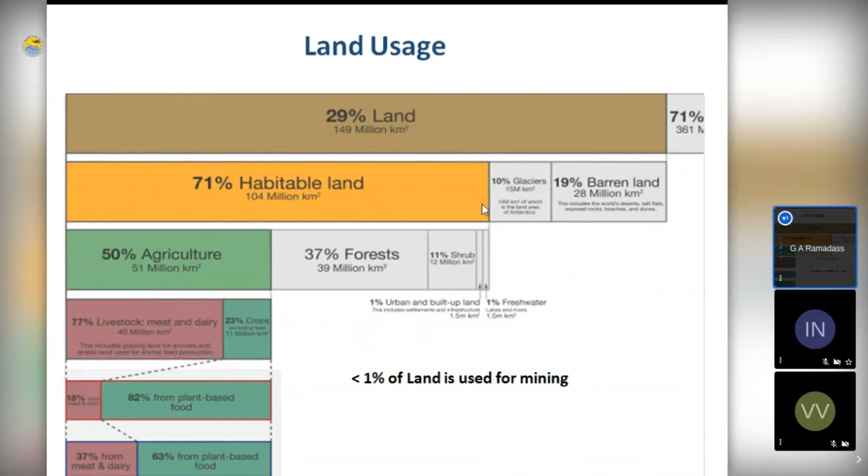Like that, if you see, hardly 1% of the land is used for mining. And we have been using the minerals from this land. We have been using, misusing and abusing these minerals for the last 5,000 years. And imagine if 1% can see us through for 5,000 years, then what can 70% give us? So that is the importance of the deep ocean mining concept.

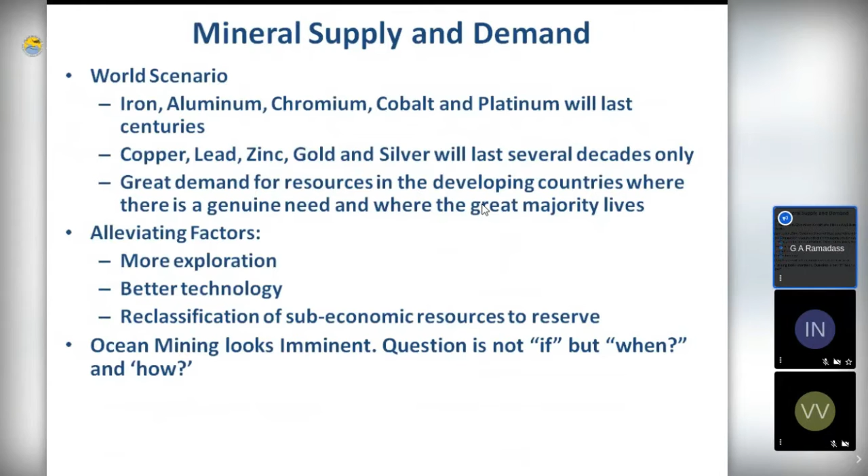Of course, we can alleviate these things by more exploration, better technology, and reclassification of resources to reserves. But there is a limit to what we can do about it. So ocean mining is imminent. It's not the question of if, but when and how.

So this is the history. In 1870 itself, there was speculation by Jules Verne, a famous science fiction writer, about the availability of these minerals at the sea bottom. But he said it is easy to exploit it. It's easier said than done, and we find it very difficult now. And as you can see in the right-hand side corner, that's a painting of HMS Challenger.

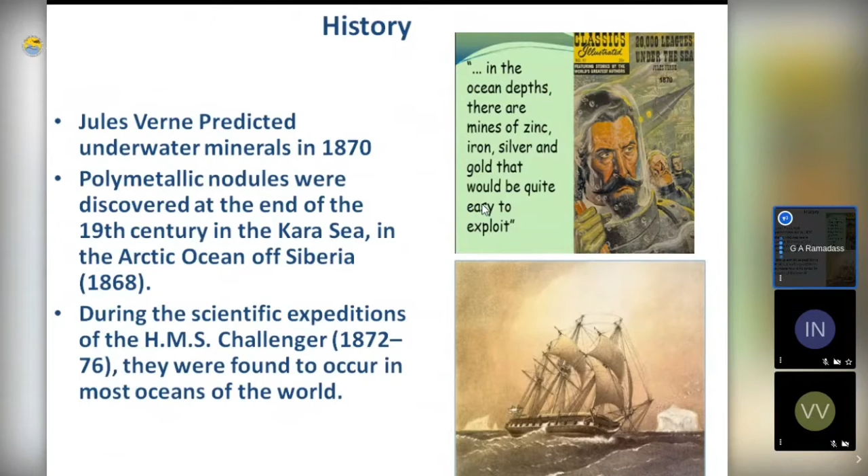During 1872 to 76, they sampled some polymetallic nodules, which are like potatoes strewn on the seafloor, and they found that they are rich in iron, cobalt, nickel, and manganese. So we can say that that is the beginning of the ocean mining efforts.

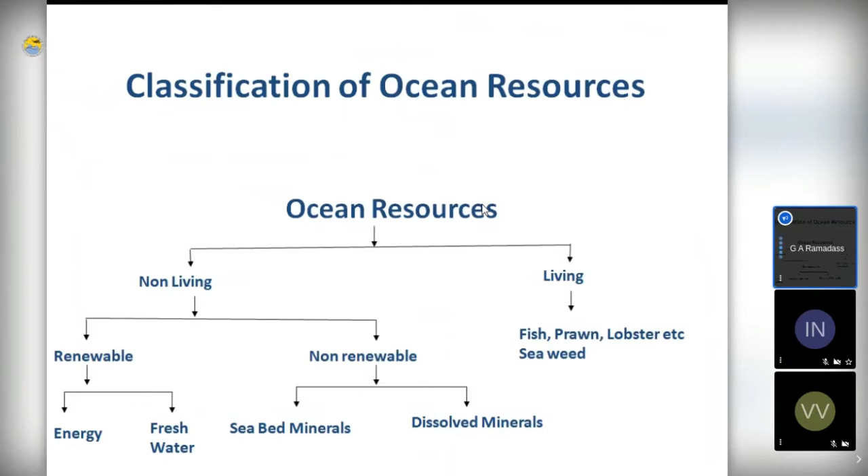And there is no unique way of classification of these ocean resources, but I can say that there can be living and non-living resources. In the non-living, today we are going to concentrate only on the seabed minerals, because there are some dissolved minerals like salts, uranium, and other metals. Our concentration is on the seabed minerals like oil and natural gas, but I'm not going to talk much on them, and diamonds also I'm not going to talk about.

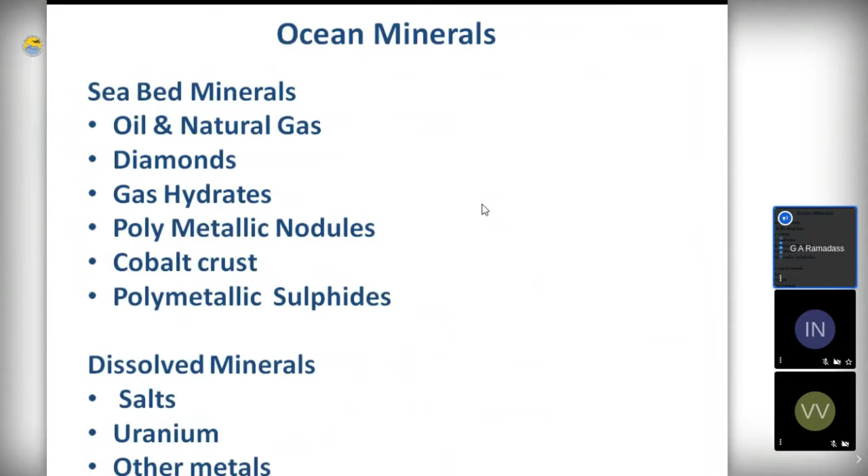But gas hydrates, polymetallic nodules, cobalt crusts, and polymetallic sulfides are of interest to the Ministry of Earth Sciences. So we will be concentrating on these four resources. As you can see, India has an exclusive economic zone which extends up to 200 nautical miles. The extended exclusive economic zone extends even further. So whatever is available here is our resources. We can use them without any express permission from any other organization.

But beyond that, it's called the high seas, and it is regulated by the United Nations, especially by the International Seabed Authority. It is an independent body, and they allot areas for the exploration and exploitation of the minerals, and that area is called the Area. Here the rights are only given for what is available on the seafloor, but the waters above are called high seas, and we have no rights to them. A portion of the profits from this mining, whenever it comes, should be considered common heritage of mankind, and it should be used for all mankind.

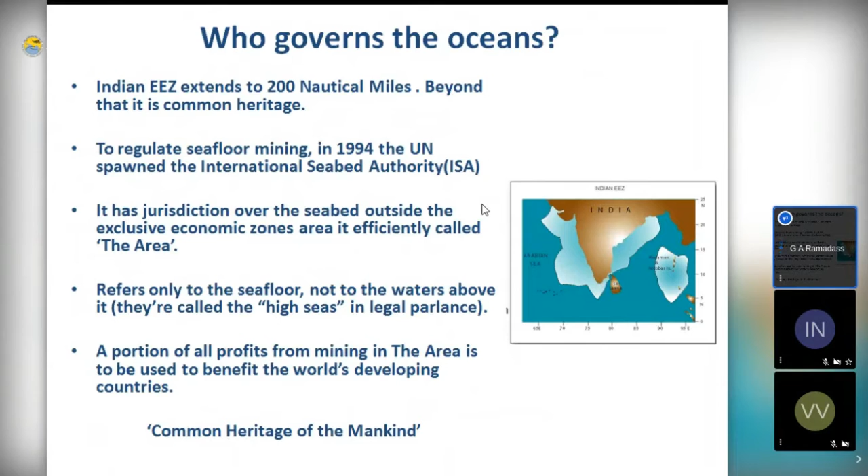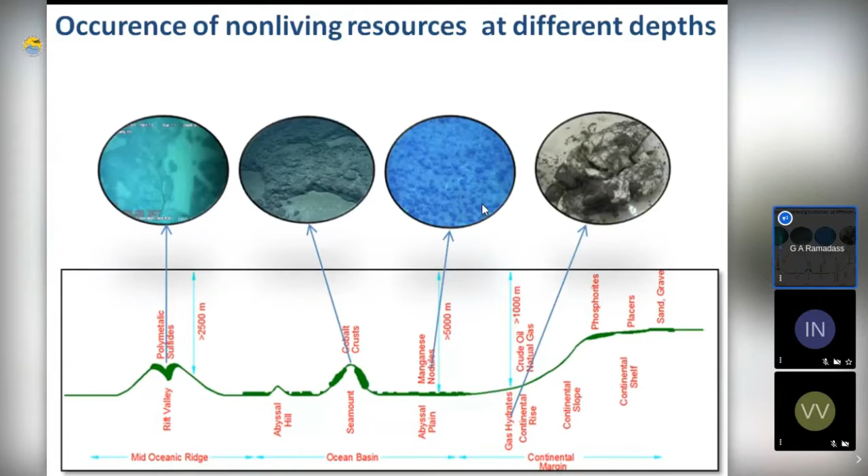So where do these minerals occur? Starting from the continental slope and continental rise, the first mineral that generally occurs is the gas hydrates. As the very name suggests, it is a hydrate which contains gas. It is like camphor. It can be lighted, and you can hold it also.

It's estimated that even if a mere 15% of the world's gas hydrates can be tapped, the next 200 years of energy requirements can be met. Of course, we have to take it with a big pinch of salt. So the Ministry of Earth Sciences has an exclusive program on these gas hydrates, especially in the Krishna Godavari basin. We have concentrated our efforts.

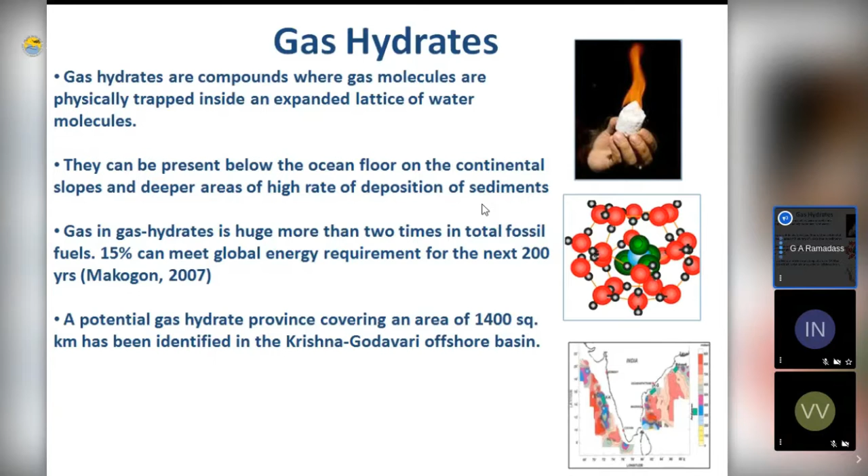The next one is polymetallic nodules. These polymetallic nodules are ferromanganese deposits. They actually look like potatoes, maximum 10 centimeters in size. They are called two-dimensional minerals in the sense that they are available on the sea floor, and all we have to do is pick them up from those depths. But it's at 4,500 to 5,500 meters water depth.

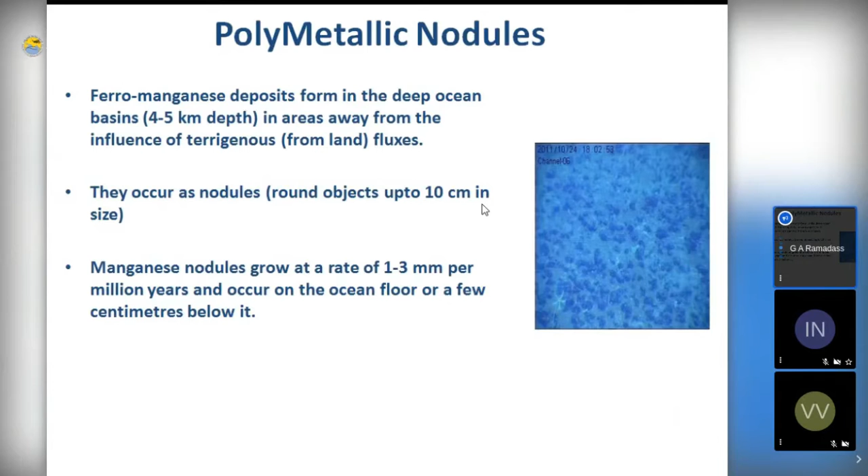And these nodules grow very slowly, maybe 1 to 3 millimeters per million years. And that too, when there is a nucleus like a shark tooth or some kind of hard rock, around that, layer by layer, these things grow.

As the old joke goes, by the time the ship reaches there and starts working, 50% of the team is seasick and the rest of the team is homesick.

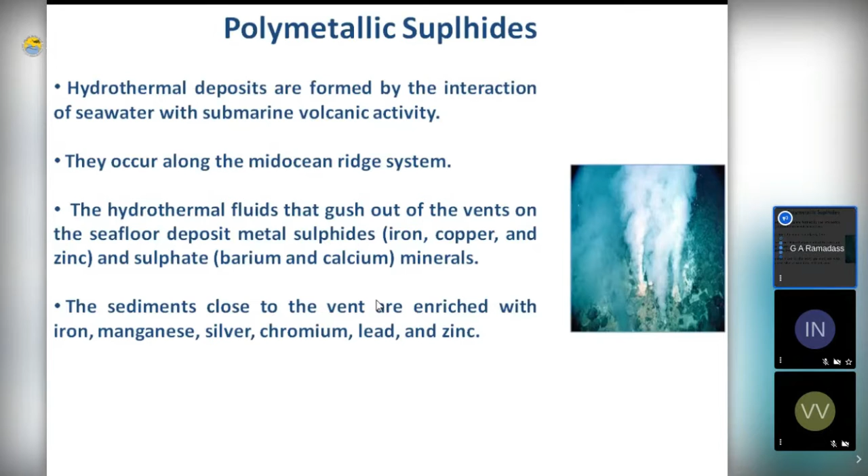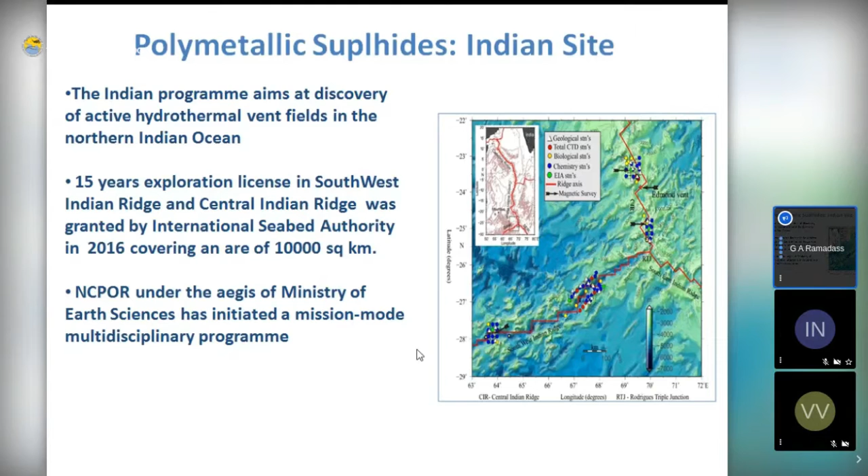And India has signed an agreement again with the International Seabed Authority for a 15-year exploration license in 2016. This is even further, at around 25 to 26 degrees south, as you can see in the picture. And the National Centre for Polar and Ocean Research, NCPOR, under the aegis of MoES, has started a mission mode multidisciplinary program, and they have done a lot of survey and sampling work at this place.

Another important mineral is the cobalt crust. Cobalt crust is very much similar to the nodules, but they are like layers stuck to the ocean bed. So we have to scrape it and take it. It's not exactly a 2D mineral, so it needs some kind of hard scraping. It generally occurs in seamounts, and there are around 33,000 seamounts worldwide. In the map, the areas marked are the seamounts. India has not yet signed any contract with the ISBA for exploration of this cobalt crust.

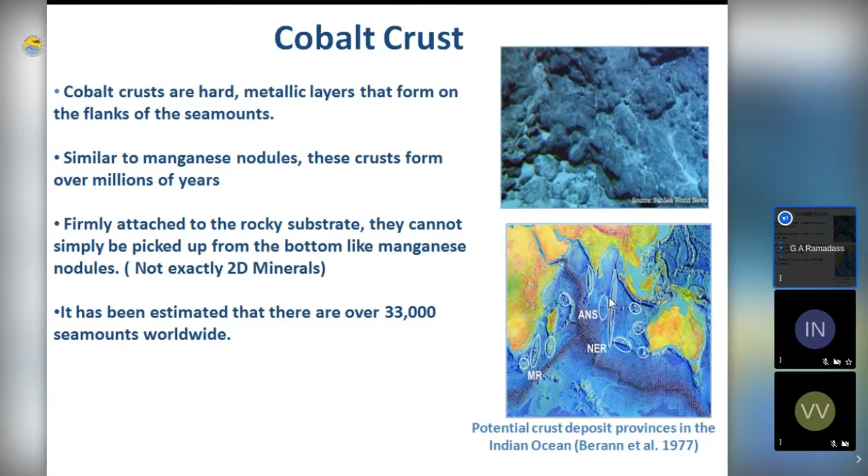So what are the challenges? Minerals are available, but it's not as easy as terrestrial mining, because oceans, as we call it inner space, are more difficult to conquer because it's a dynamic medium, and the hydrostatic pressure at 6,000 meters is around 600 bar. So if you send a big vehicle there, it actually becomes a sort of pulp at those pressures. So we need to develop appropriate pressure resistant, pressure compensated, and pressure tolerant technologies. Density and salinity variations also pose problems. Temperature is around 35 degrees on the surface and around 2 degrees centigrade at the bottom.

Of course, corrosion, especially galvanic corrosion of different metals, is a serious problem. Another serious problem is electromagnetic radiation doesn't travel in water more than a few hundreds of meters, or tens of meters in fact. So you can control a Mars rover sitting on Earth, but you cannot control a machine that is operating on the seabed from the ship without a cable, because electromagnetic radiation doesn't even travel maybe beyond 100 meters. So we have to depend on sound, which is 1 lakh times slower, and the information that can be carried is very small using that.

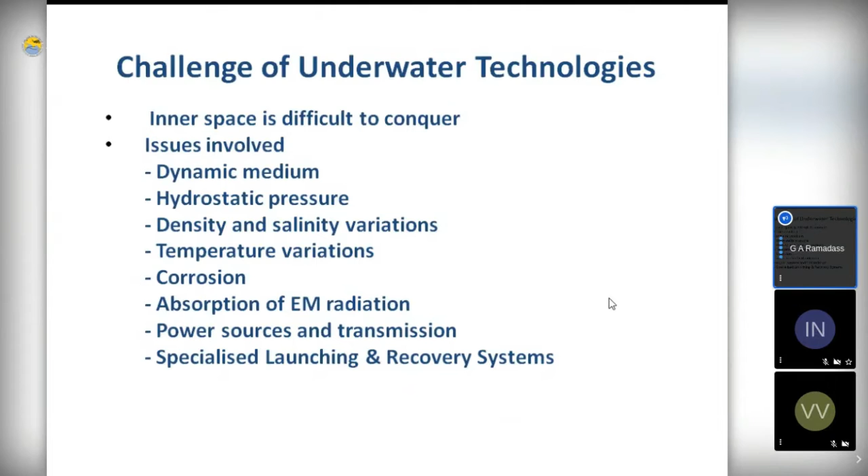And power sources and transmission: the power has to be transmitted from the top using a very long cable or using batteries with some limited capacity. And also the ship actually is not very stable in the high seas. So we need specialized launching and recovery systems.

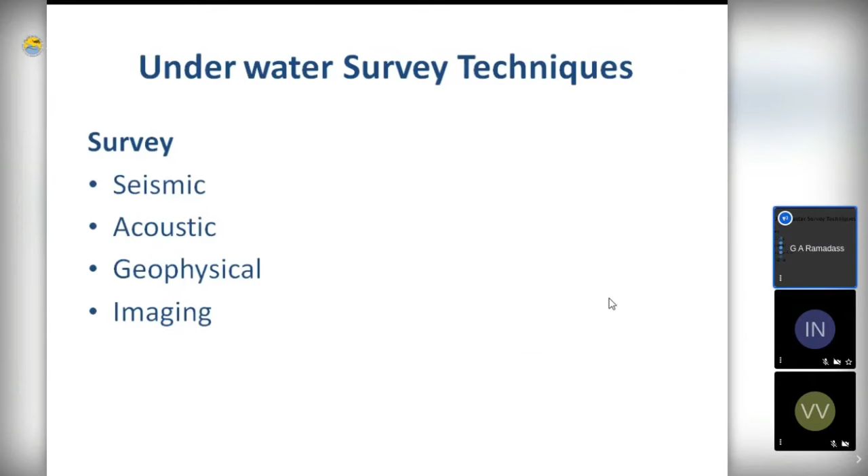So now we know we want to survey how these minerals are occurring and where they are occurring. So what do we do? There are different kinds of survey techniques available to us. There are seismic techniques, acoustics, geophysical, and imaging techniques are also there.

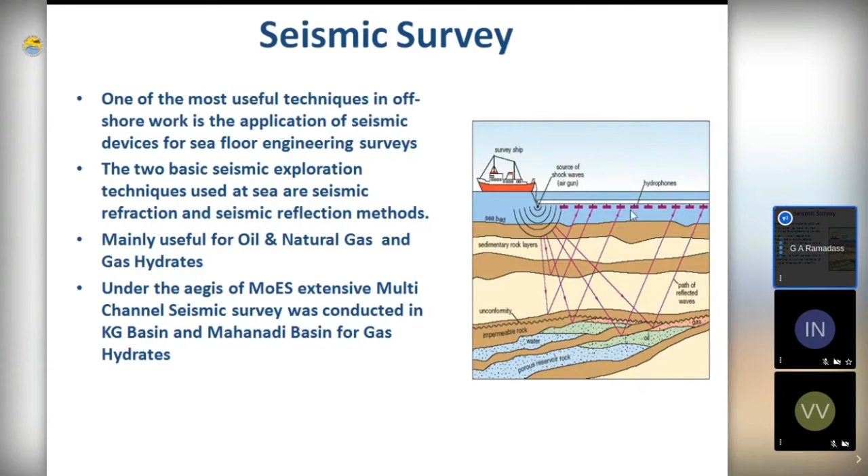So by using hydrophones, which are towed behind the mothership, we can receive these signals and analyze them, and we can detect some kinds of minerals, especially oil and natural gas and gas hydrates. These seismic techniques are really not useful for polymetallic sulfides or polymetallic nodules, but they are an excellent survey technique for gas hydrates and oil and natural gas.

Next comes acoustic survey systems, because we don't have the luxury of using electromagnetic radiation. If you want to see Saturn's rings or Jupiter's satellites, you can go to your terrace with a good telescope and see them. But if you want to see what is below in the water, you have to take a ship, go to that area and launch equipment which can go to the bottom. So in fact, in oceans, we use sound to see. Most of the equipment used there is acoustic based rather than electromagnetic based.

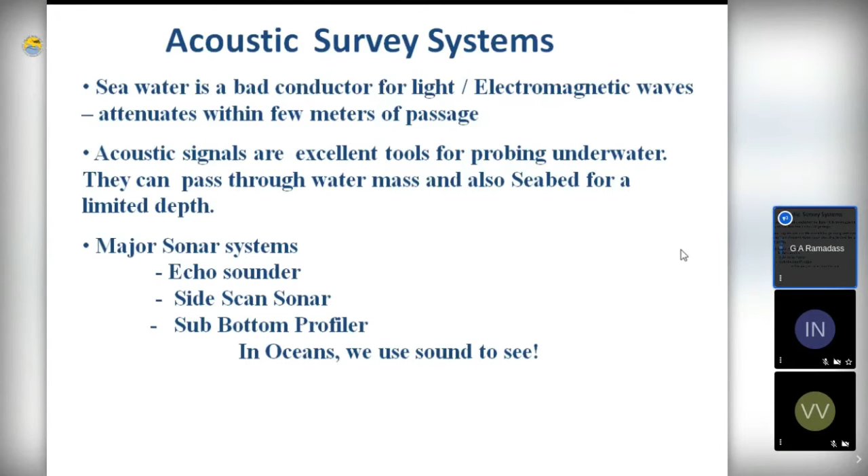Even the location of the object that you are placing on the seabed has to be found using acoustic techniques, similar to terrestrial GPS, because the GPS signal is not available at the sea bottom. So we have to use acoustics. For the survey's sake, we use sonar systems. There are umpteen sonar systems of different types, but for our survey we use three different kinds of sonars: echo sounder, side scan sonar, and sub-bottom profiler.

As you can see, a single beam echo sounder or sonar just sends a pulse below the ship. The sound pulse hits the bottom and comes back. We measure the time elapsed for the signal to go down and come back. And we know the velocity of sound in water, which is approximately 1500 meters per second. So by multiplying the time and the velocity, we can get the distance. Half of that is the distance between the ship and the seabed, that is the depth. As the name suggests, the single beam sonar sends only one pulse, so you get only one point below.

But in the open ocean, covering a large area is difficult with the single beam sonar. So there is another way of doing it, called multi-beam sonar. 240 beams are radiated into the water. They cover a large swath of area at the bottom. When they come back, we can construct the bottom. You can see on the right hand side the difference in the detail we get when we use multi-beam sonar and a single beam sonar.

And the next one is side scan sonar. Side scan sonar is an imaging sonar. You can actually see what is there at the bottom. These side scan sonars are used for finding the two-dimensional minerals that are lying on the bottom, and they are also used for search and recovery, for seeing shipwrecks or lost aircraft and many other objects of interest on the seabed.

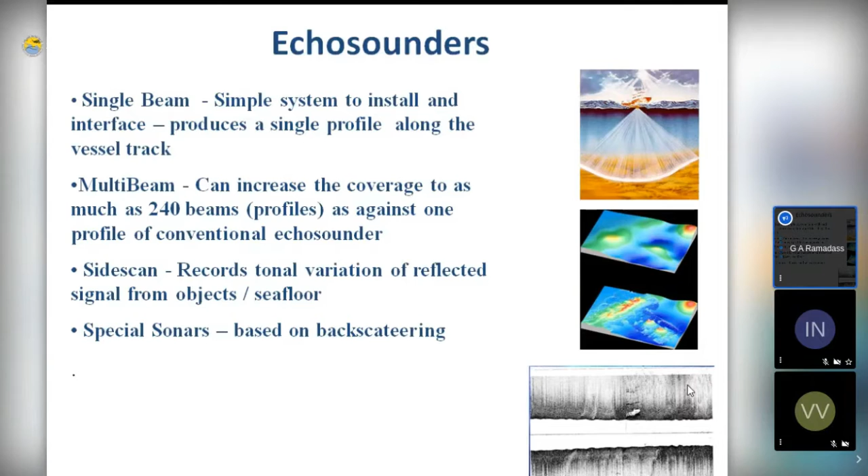And there are, of course, some special kinds of sonars which work on backscattering. I'm sorry for this spelling mistake there. So the nodules scatter the incoming sound radiation, and by studying that backscatter, we can estimate the objects that are lying on the seabed.

But so far we have learnt about the survey techniques that can be used from the surface. But for 6,000 meters, if you want to really penetrate, you have to use very long wavelength sound. The problem with using long wavelength sound is that you get very coarse resolution. Okay. So many of the details are lost when you do the survey from the top at 6,000 meters water depth. So what we have to do is take this equipment close to the seabed. For that, we need some kind of underwater vehicles.

So the first one we generally use is called a deep tow. As the name suggests, it is towed behind a ship. It is hydrodynamically designed in such a way that at a given speed, it flies at a given depth below the sea surface. So a suite of sensors is fixed onto it, and as we tow the tow body behind the ship, you can collect a lot of information, data and even imagery, and this can either be transmitted online to the ship or stored in the deep tow itself. So this is a typical deep tow used by Scripps Institution of Oceanography.

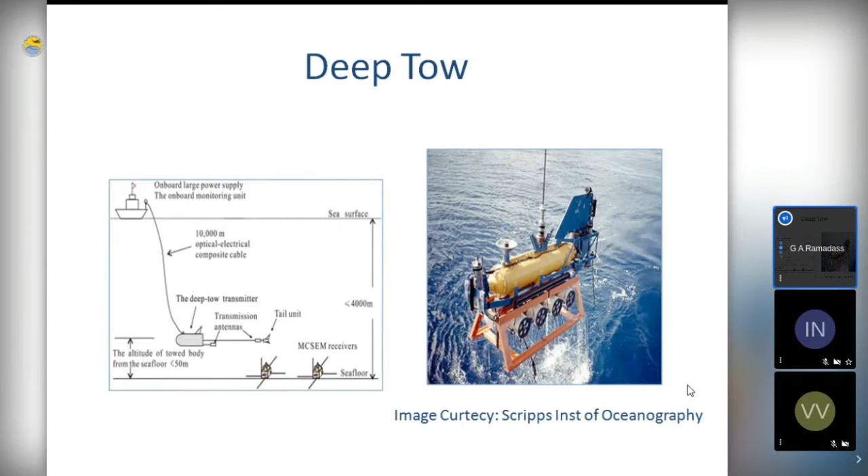And for taking video or still photographs at the bottom, this deep tow has to fly very close to the sea bottom. But the sea bottom need not always be even. So especially in places like hydrothermal vents, it's very hazardous to fly these systems just above the seabed. So the next system is a remotely operated vehicle.

It's a robot which can go down, and there are a variety of remotely operated vehicles based on size and function. What we are showing here is a work class deep water remotely operated vehicle developed by NIOT. The payload comprises sonars, lights, cameras, and sampling devices. Beyond a few hundred meters depth it's pitch dark, so you have to carry your own lights for taking images of the bottom and the objects that lie there. These vehicles are also used for taking sampling devices to the bottom.

And the ROV has an umbilical that connects the ROV to the mother vessel. So you can see what it is doing. You can intervene, you can use the robotic arms, and you can do some kind of intervention. But the problem is that the distance it can move is limited by the length of the cable. If you use an autonomous vehicle, which doesn't have any connection with the mothership, a self-propelled autonomous vehicle, then this problem is not there. You can have a wider reach.

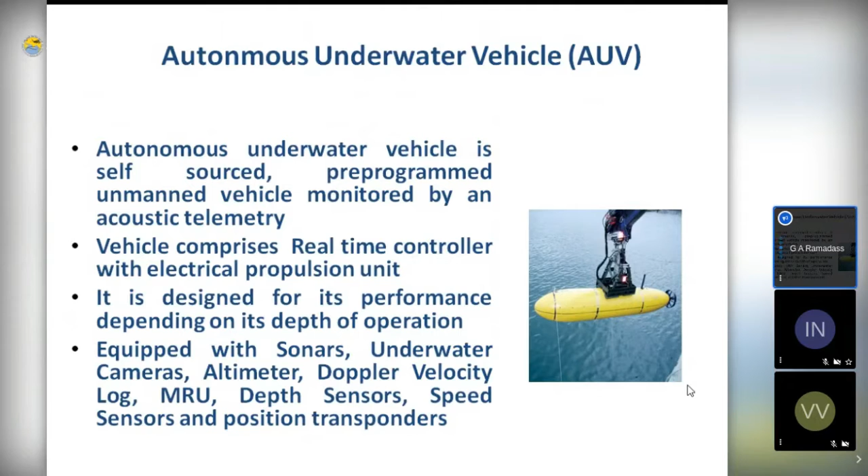But the problem is that because of the lack of communication between the autonomous vehicle and the mothership, you don't know what it is doing. It is completely pre-programmed. It flies the way you program it, and it collects all the data that is intended to be collected. And you can see this data only after it is recovered. Maybe you can get some rudimentary communication using acoustics, but you cannot get any online control over this AUV from the mothership. It is equipped with sonars, underwater cameras, altimeters, even magnetometers. Any sensor of interest can be interfaced with this AUV.

So now we have done the survey from the surface. Then we have gone into the water column, and just above the seabed, we have made the survey using deep tows, ROVs, AUVs, and all. Now we know what is there on the seabed. But how do you sample it? To know what is lying there, what the abundance is, what the grade of the ore is, and whether it is really worth collecting this ore from the seabed, we need some kind of sampling.

So there are different kinds of sampling devices like grabs, dredgers, and corers. These have been extensively used by National Institute of Oceanography, Goa, and now by NCPOR Goa. To give a feel of it, I'm mentioning only two grabs: one is the Van Veen grab, and another the boomerang grab. As you can see from the picture, the Van Veen grab has a scissor-like contraption, with two arms and some buckets.

When this grab hits the bottom and a rope is pulled, it closes, and while closing, it actually traps some kind of nodules or minerals or sediments that are lying there. With the cable, you can pull it up and collect the nodules or samples at the surface. The one you are seeing here, a boomerang grab, doesn't have any cable.

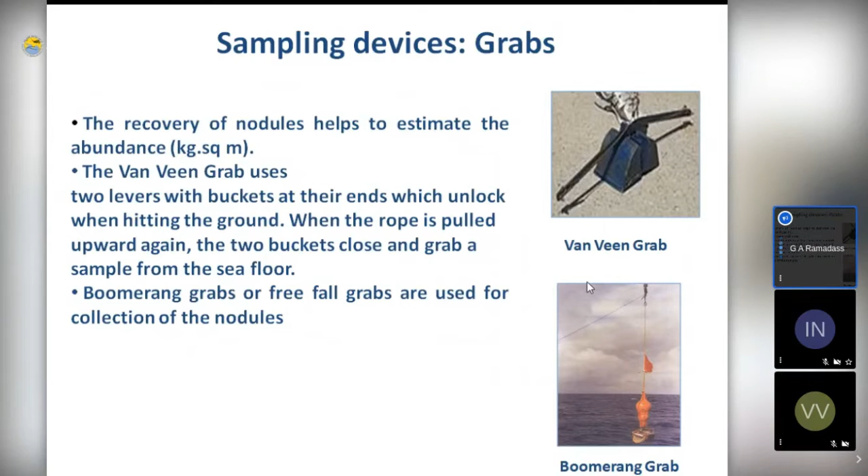And you can analyze these minerals and say whether they are of good grade, whether it's worth really proceeding further.

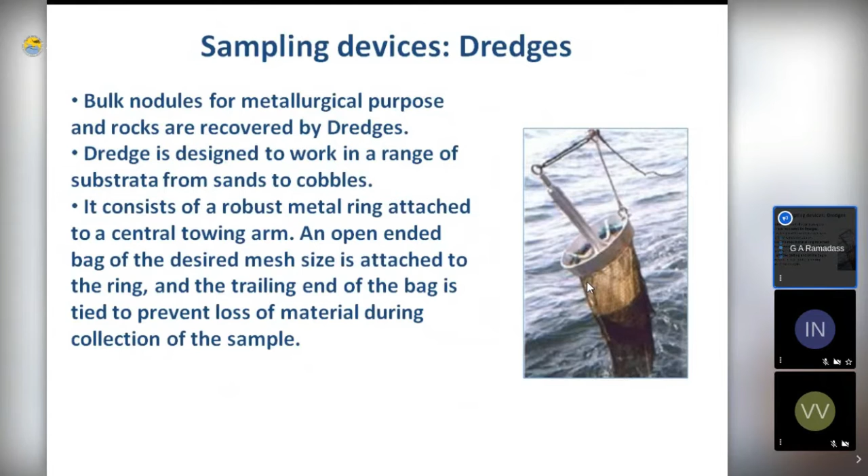There are some other sampling devices called dredges. These are launched with a rope from the ship. They have a net behind this, a metal ring, so it is weighted and literally dragged on the bottom. When it is dragged, these samples and minerals get collected there, so it can be brought back and you can have the samples for analysis on the ship.

Another one is the corer. When you launch these things with the weight, they go and penetrate the bottom, and some core is actually trapped in the barrel, and you can bring it up and analyze it.

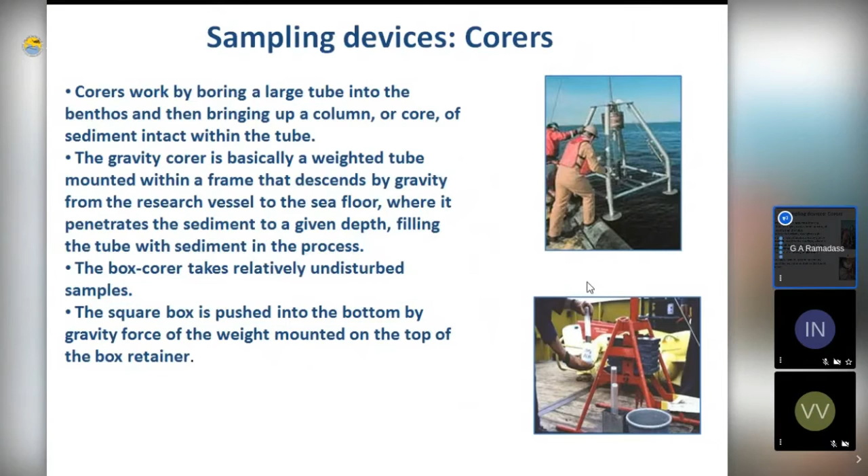There are different kinds of corers, different variants. I'm only showing two varieties of them: one is a gravity corer and another is a box corer. The box corer is pushed into the bottom by the gravity force, and we get many times undisturbed samples of the bottom using this box corer.

So now we know we have surveyed, then we have gone into the water, had a close look, and we have even sampled these things, and then estimated what is the grade of the ore. But now we have decided to at least mine them, at least by exploratory mining, if not for the commercial mining. Then we need some kind of underwater mining machines which can go and move on the sea bottom and collect the minerals available there.

There are different types of mining vehicles. Different countries have used different kinds of technologies. These can be broadly classified into self-propelled systems and towed systems. As the name explains, the towed system doesn't have any self-propulsion, it has to be moved behind a ship.

The problem with this system is that the ship has to move, and if you have to cover a large area, the ship has to make those movements. It's actually very expensive and very time consuming, and economically and technically it's not a very efficient system. The other one is the self-propelled system.

These systems move on the soft seabed. The seabed is so soft here at some places, especially in the polymetallic nodule sites. The bearing strength is hardly a few kilopascals, shear strength is around maybe 2 kilopascals. So it is like grease.

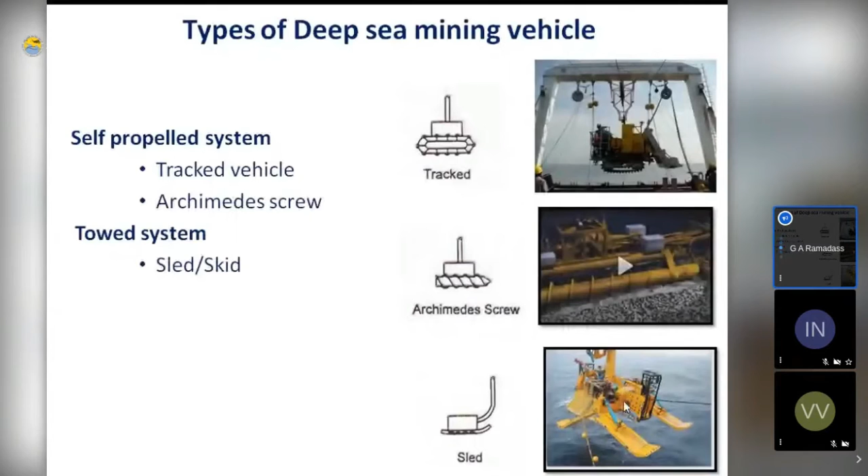One of the most successful demonstrations of underwater mining is actually the Glomar Explorer. It used this kind of Archimedes screw for propelling. But there are still some people, like especially Japan and China, who are still trying to use these sleds for their own purposes. You can see this Korean institute called KORDI, they use a self-propelled test miner.

The sea trial is done in 2009 and 2013. The maximum distance depth they have gone is 1300 meters.

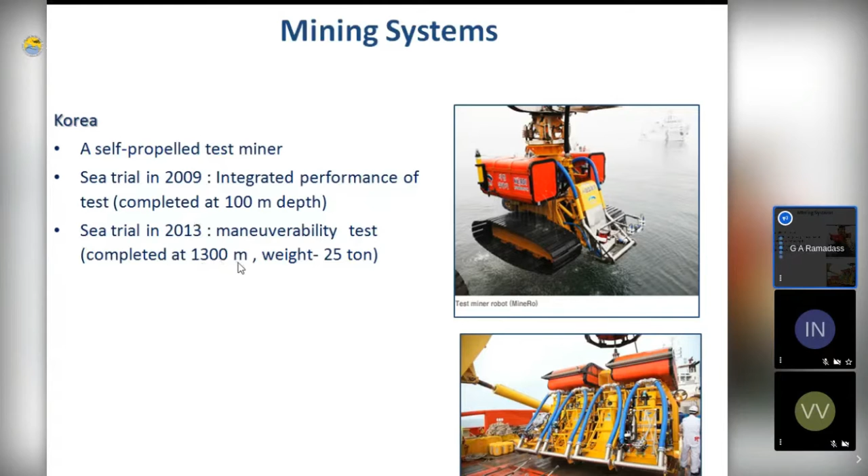The next one is actually China. China has gone for this tracked vehicle, you can see with a track belt it can propel forward. Whereas Japan has done some experiments with a towed miner system.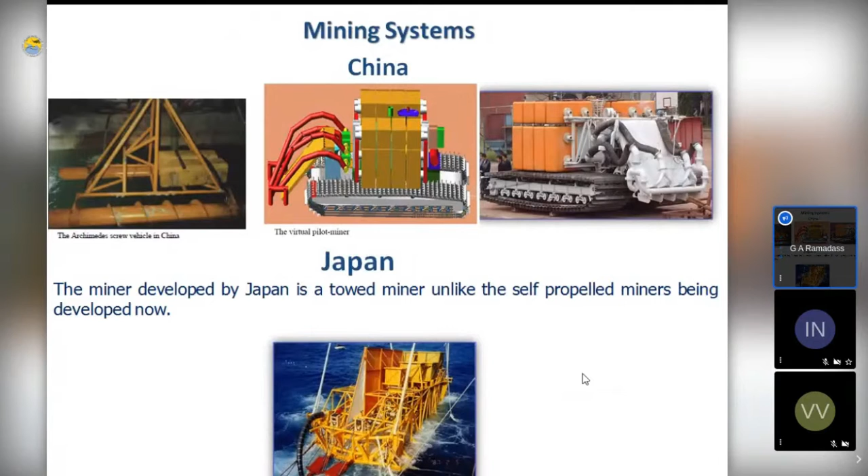So, we have a mining system which can move on the sea bottom, but it has to collect the nodules, or collect the samples, especially when we are talking about two-dimensional minerals like nodules. It is easy to collect these things, but we need some kind of collector systems with appropriate efficiencies.

These collector systems can be passive. That means a collection system is attached to the mining machine. When the mining machine moves forward, it plows through the seabed and collects the samples, and whatever is not needed is thrown out. But it's not a very efficient system, because it actually slows down the collection.

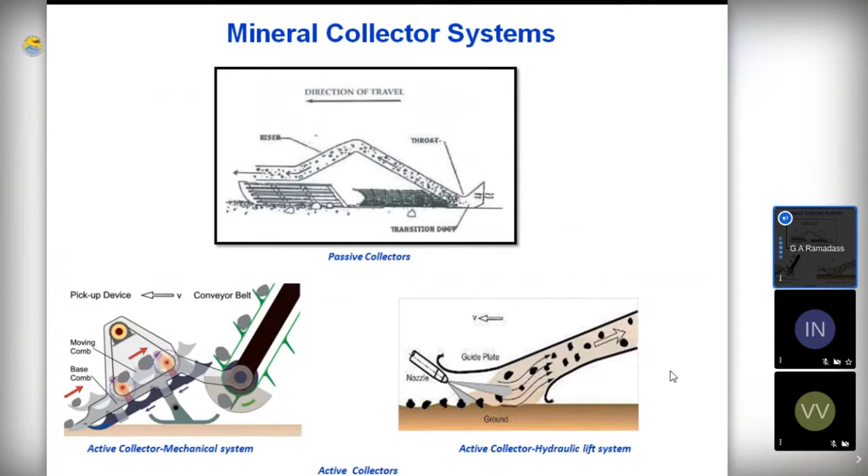So now we have collected the nodules, let us say. Now the mining machine collects them, but how do you send it up to the mothership? How do you bring it up to the mothership? Let us remember that it is actually around 5,500 meters water depth.

Another very innovative idea is to send autonomous underwater shuttles, or you can call them drones. It can go down, collect these nodules from the mining machine, and drop some weight or pump out some water, become buoyant, and come up and deliver the ore to the surface. It is very energy inefficient, time consuming, and technologically very complicated. The idea looks good, but the devil is in the details, and the implementation is really difficult, so it was tried and actually dropped. But as the technology develops and matures, maybe we will have to revisit it at an appropriate time.

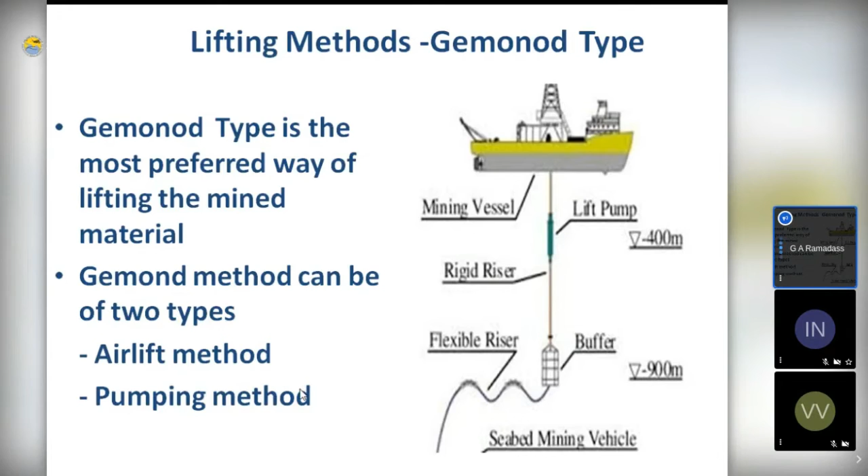One is the airlift method and the pumping method. Airlift method, as the name suggests, you have to have a high pressure air source on the ship, and this has to be pumped to the bottom of the riser system. So when the nodules come here, these air bubbles make it less dense, and when the bubbles rise to the top, these nodules are transported to the top. It is doable for shallow depths, but for depths like 6,000 meters it's a very low efficient system, and over those depths we may have to have more openings at different places for pumping this air. So it is a slightly messy system, and it is not used in this form in underwater mining technology.

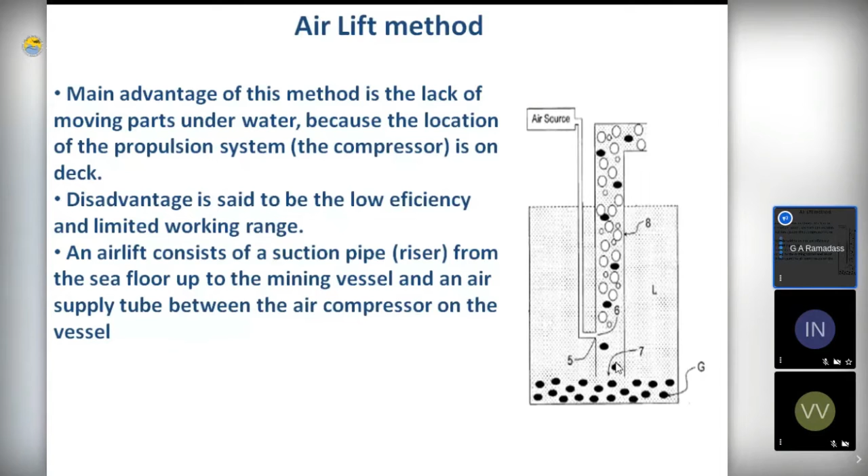The next one is the pumping system. Instead of having air from an air source at the top, there is a pump at the bottom or at intermediate places in the riser. So with high pressure, the nodules mixed with seawater are pumped to the mothership. You can use centrifugal pumps or positive displacement pumps. Both have their advantages and disadvantages, but if you want to use centrifugal pumps, it is used to obtain high flow with limited pressure head.

So you need a number of these centrifugal pumps at different depths of the riser. We cannot use just one single pump, and we should have so many openings for the power supply and control. It is actually a difficult system to implement. But in the Glomar Explorer, which was a very successful demonstration, they used this kind of multi-stage pumping.

Otherwise, you can use a positive displacement pump, fixed to the bottom of the riser, on the seabed itself. These positive displacement pumps capture the fluid in their chamber, and using high pressure, they push it into the riser. This is a widely used one, but our calculations show that for almost a 10% slurry, we need around a minimum of 120 bar pressure based on the dimensions of the riser hose. It's not easy to have this kind of pump at the bottom with a power supply.

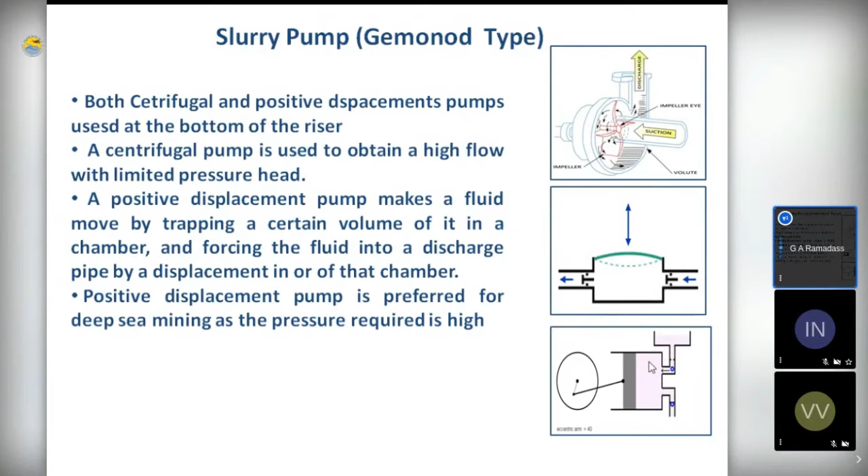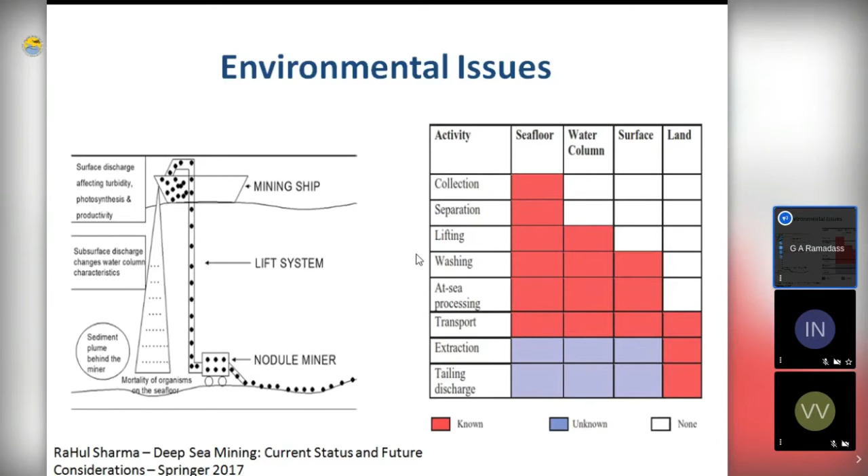This table shows that each component of the mining system, what sort of disturbance it generates and where it generates. So we have to make our system environmentally compliant or friendly.

Coming to the international scenario, there are different countries which are sponsoring states and contractors for the International Seabed Authority. There are multinationals and conglomerates working on this. Generally, Korea, China, Japan, Belgium, EU, and India are very active in technology development for the PMN. Russia, Inter-Ocean Metals, Germany, and Japan are active in exploration also. And the technology demonstration was carried out so far in USA, Japan, Belgium, and of course India.

So the first and foremost experiment conducted for mining of the nodules was the Glomar Explorer. It was a covert operation for lifting a missing or sunken Soviet submarine, but the objective was given as mining of the polymetallic nodules in the Pacific Ocean. But to their credit, it has been done. They used huge technology - metaphorically, used a cannon to kill a fly - but they demonstrated that it's doable, that the technology is technically viable to pump these nodules from these depths. It was demonstrated in the mid-70s.

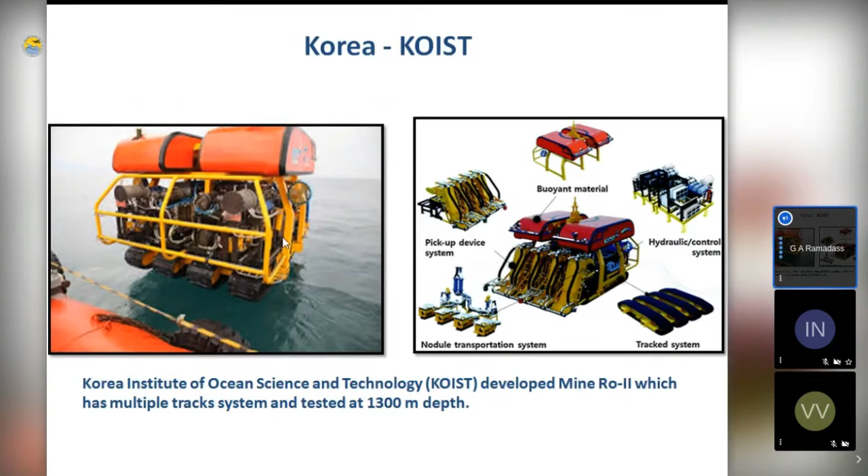600 tons of nodules are actually pumped from around 5,000 meters water depth. It is actually south of Hawaii. Korea has done this demonstration, as I mentioned earlier, at 1,300 meters water depth. They have used a propelled mining crawler for this one.

And recently, Belgium has taken a lead, actually. Global Sea Mineral Resources, GSR, they have signed a contract with ISBA, and they made a bottom crawler. They're called Patania 1 and Patania 2. And they have successfully demonstrated only the locomotion of this system at 4,500 meters water depth.

And the most successful and the most recent story is Japanese hydrothermal exploration. As you know, Japan is sitting on the ridge itself. So in 2017, they made a tracked vehicle with a cutter and cut these minerals at the bottom. And if I remember correctly, it is 1,600 meters water depth, and they pumped it successfully to the mothership. Japanese agency JOGMEC was very much successful in this one, and this actually gives a lot of hope for us also to move forward.

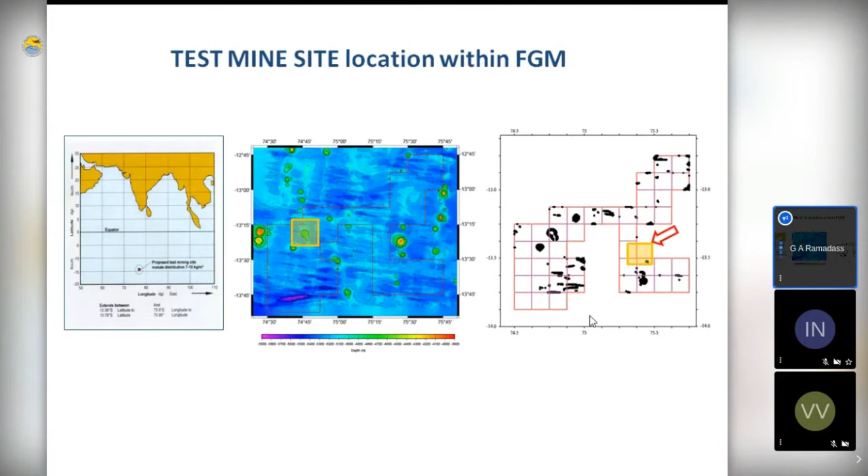And as you can see, when the site was given, it is at 13 degrees south. I would like to tell you that Chennai is at 13 degrees north, and this site is at 13 to 15 degrees south. The survey was conducted, and a first generation mining site was identified here. The abundance was estimated. Average abundance is around 7 kg per meter square at this place. And the best grade where it is available was also estimated. A first generation mining site and a test mine site was given to us, where we can conduct our mining tests in future.

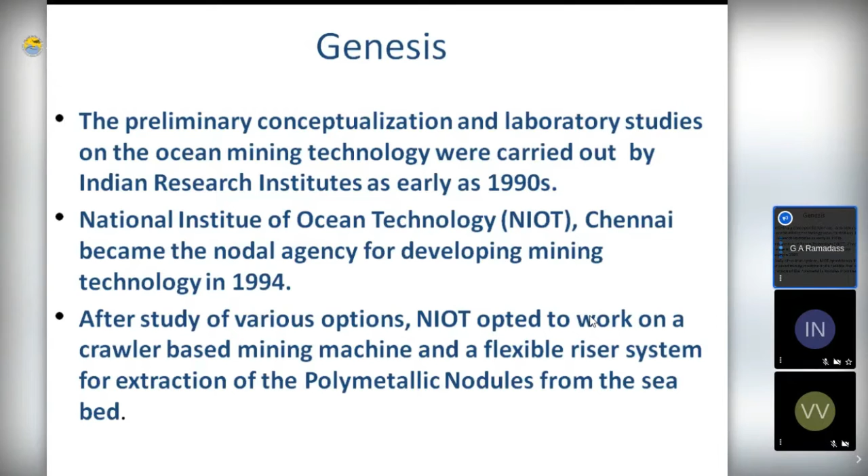So the genesis is like this. The preliminary conceptualization of this technology was done in the 1990s by different laboratories. But with the inception of NIOT in 1994 by the then DOD, the responsibility was given to NIOT for developing mining technology for these deep ocean minerals. And NIOT opted to work on a crawler-based, self-propelled tracked system with a flexible riser system. This was a conscious decision because we used a flexible riser, not a rigid one. If we had insisted on the rigid riser, we would have required a ship with a moon pool, almost with the specifications of a drill ship.

Our motto is to develop and demonstrate the technology, make the industries interested, then transfer the technology and hold their hand. With that idea, a flexible riser was proposed. Of course, one machine with one riser will not be economically viable, but when it is upscaled, a number of mining machines can dwell on the sea bottom and collect the nodules. Then it will make the operation economically viable. So we are in the process of proving the technical viability before we go into the economical viability.

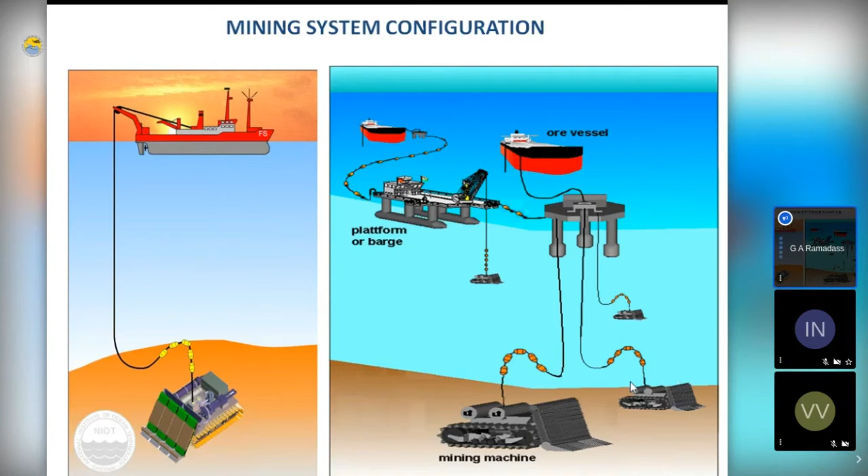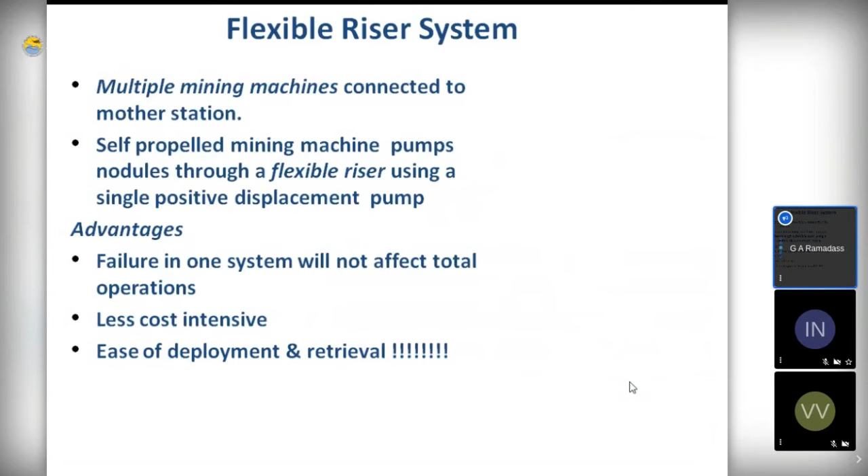So like I said earlier, multiple mining machines connected to a mother station can be used, and the advantages are it is less cost intensive and it's modular. So if one system fails, another system will work. And we thought of ease of deployment and retrieval. It is easier said than done, because launching a 25-ton equipment in the high seas with a cable of around 40 to 45 millimeters diameter is not an easy task really. When we started, NIOT was very new, so we didn't have the wherewithal to do these experiments. So we adopted a mining machine developed by University of Siegen, Germany.

They had a sand mining machine, and it was adapted for the underwater conditions. I can say that whatever ocean technology we learned in the civilian sector in this country has its origin in this crawler. This we call the underwater crawler. Whether it is lights, cameras, navigation, pressure cases, everything has come from this one.

Similarly, the sea trials were taken in 1998 and 1999 on board Sagar Kanya for proving the efficacy. One young man, you can see he's sticking his neck out literally. He was a young scientist at the time, and he's going to retire this September. He is our director, Dr. Atmanand. So it shows how far this program has come.

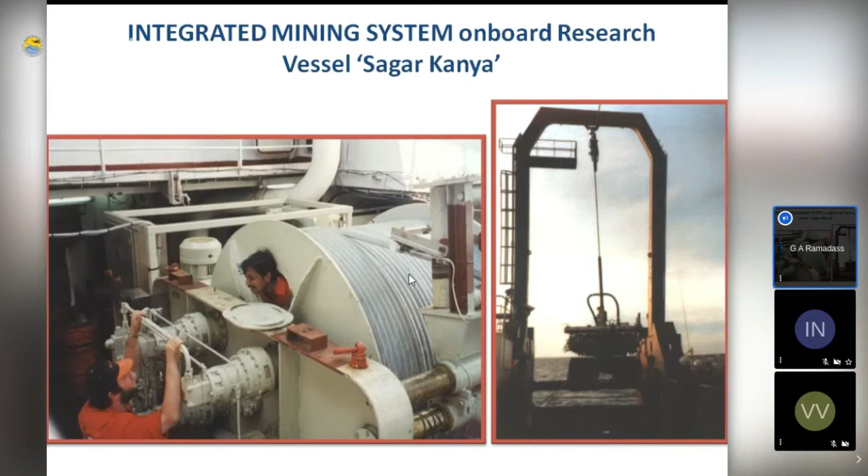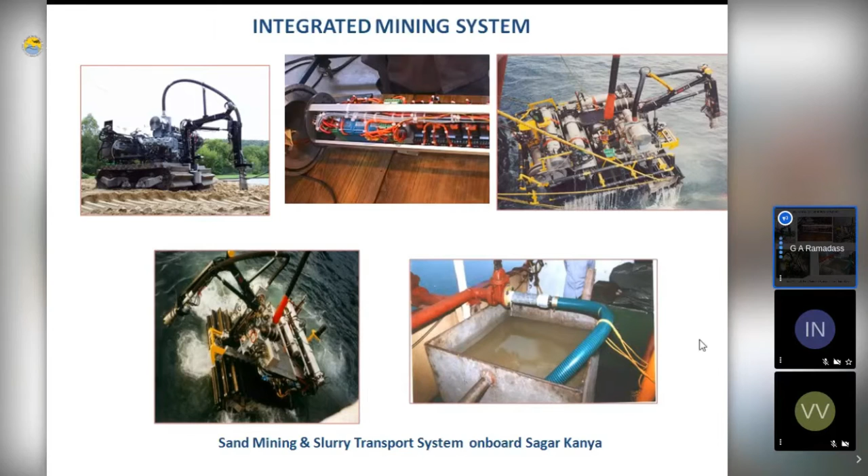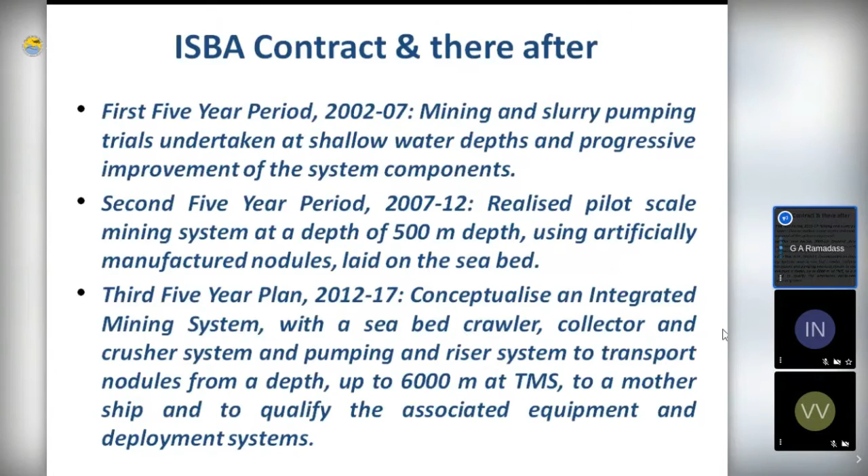And the sand mining was demonstrated at 412 meters water depth on board Sagar Kanya on the west coast of India successfully. But by 2002, a 15-year contract was signed with the ISBA for eventually demonstrating the mining at the PMN site in the Indian Ocean. So we adapted our technology for that, and we converted the sand mining system into a nodule mining system by putting an appropriate nodule pickup system, as you can see here.

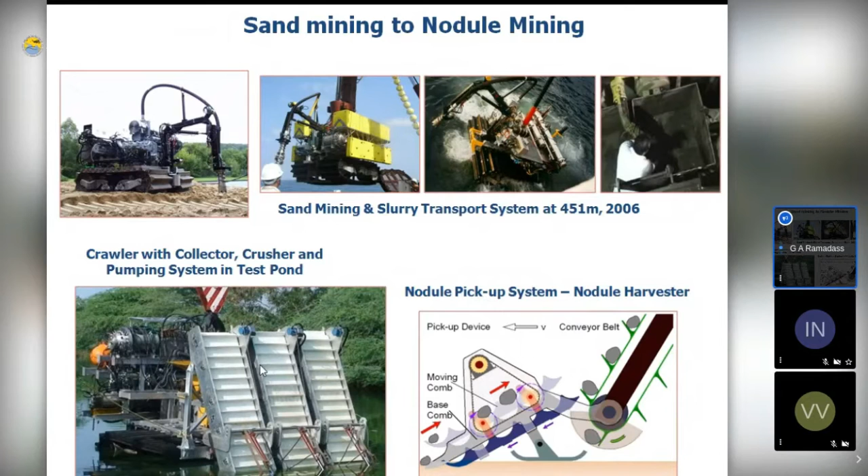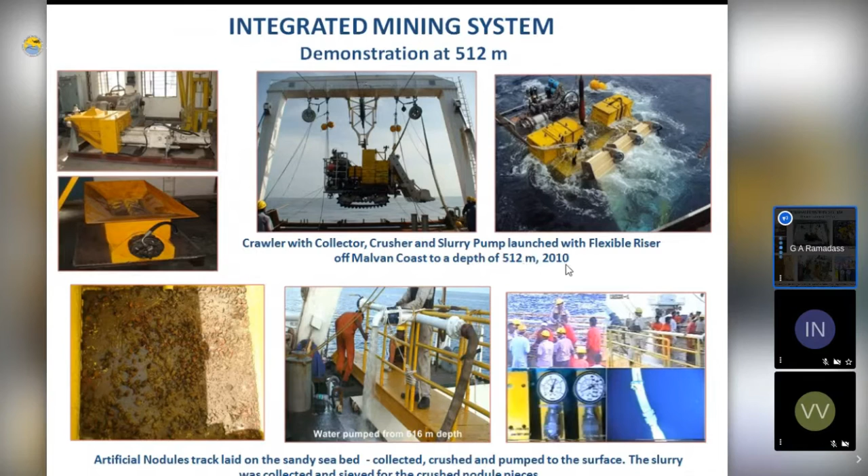But the problem is that our machine is actually capable of going to 500 meters water depth. There are no nodules at 500 meters water depth. So what we did is that we prepared artificial nodules, which have properties similar to the real nodules, laid them on the sea bottom, and then we sent our machine for harvesting them. This was successfully done in 2010 and 2011 at around 500 meters water depth. And this was actually a huge confidence booster for us.

No other country has demonstrated an integrated system like this at these depths, except for Japan, of course, at 1600 meters water depth. Now, after demonstrating at 500 meters water depth the capability of locomotion, nodule collection and pumping to the surface, we want to graduate to 5000 meters water depth. But before we go there, we have to analyze the sea bottom, what is the strength of the bottom to withstand our mining machine, and whether we can get any locomotion on it.

We used to collect seabed or soil samples and test them on the surface, but we could never get a true reading. So we wanted to make an in situ soil tester, which can go down to that depth and do the soil testing there. So we made this system which can go up to 5,500 meters. We launched it, and in the right-hand corner you can see the soil tester in the nodule field penetrating the sea bottom.

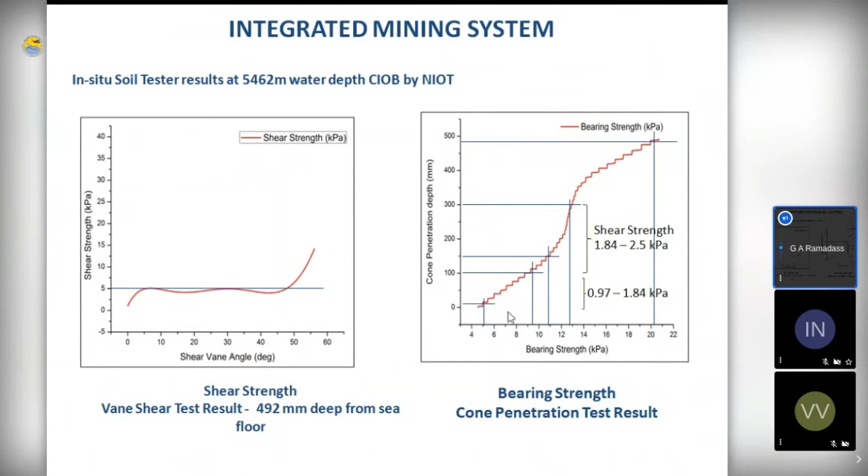We successfully measured the soil strength there, and as you can see from the graph, we got the shear strength and the bearing strength of the soil. Now we have got enough data to size and design our machine, and to explore the water column from the surface to 5,500 meters water depth.

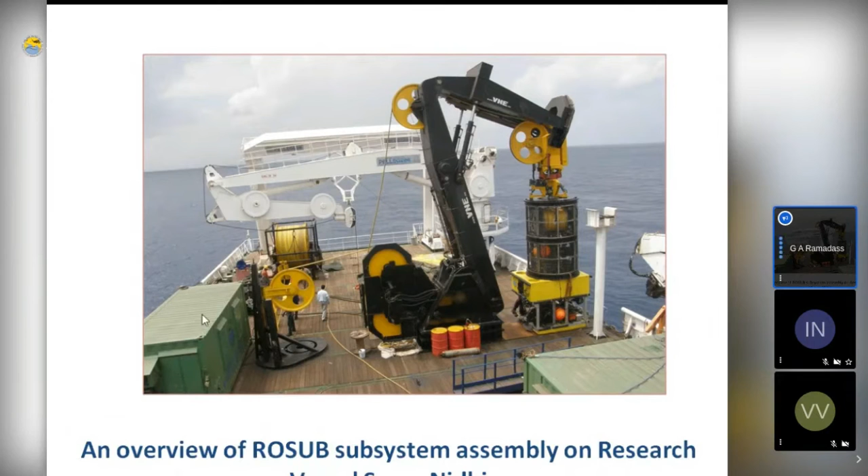It's like a microscope. Once you see with a telescope what is there, you can send it, concentrate on a fixed area, and get a high resolution survey of the bottom. We will probably be doing it in the year 2021. This is how it looks on our own technology demonstration vessel Sagar Nidhi. You can see the cable, a specialized launching and recovery system, and the ROV here, and the containers in which we sit and operate the system at the bottom.

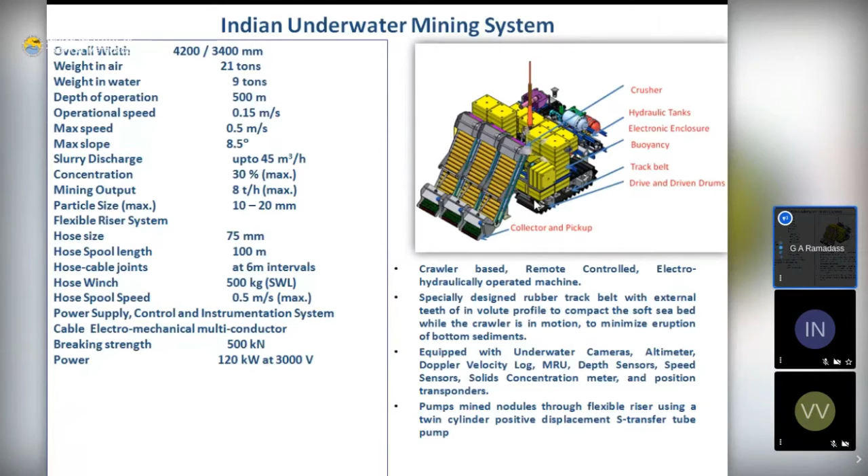So now we have seen the water column, and we have examined the bottom. Based on this data, we set about designing our mining machine with the following specifications, with a target of collecting around 8 tons per hour. We had a concept, started from the drawing board, and slowly moved on to the actual fabrication of this machine.

This machine, when it is launched on the seabed, encounters a lot of forces like traction force, bulldozing resistance, soil displacement, water drag, and all. So we have to give enough force to overcome all these for this machine to move forward. So we estimated all these things, and then we fixed the specifications of the system for developing.

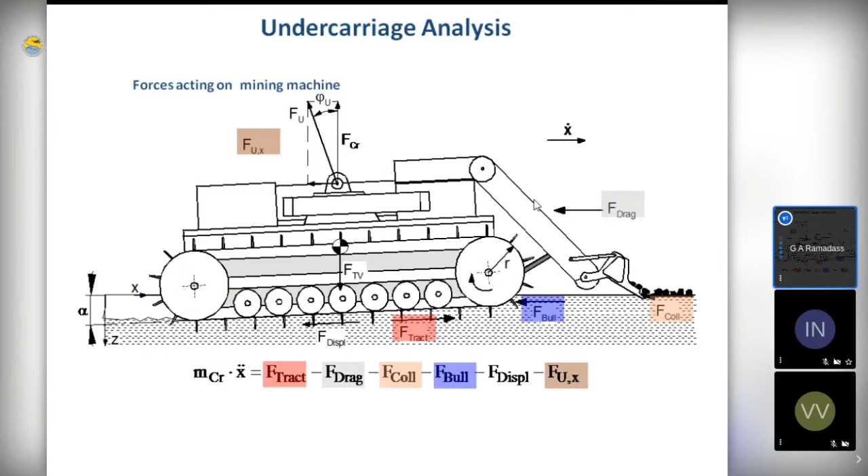So after developing the machine, how do we launch it? There are different ways of launching. Configuration and handling studies have been carried out, and after analyzing different kinds of configurations, we arrived at something called a VHFR system. And this is how it looks.

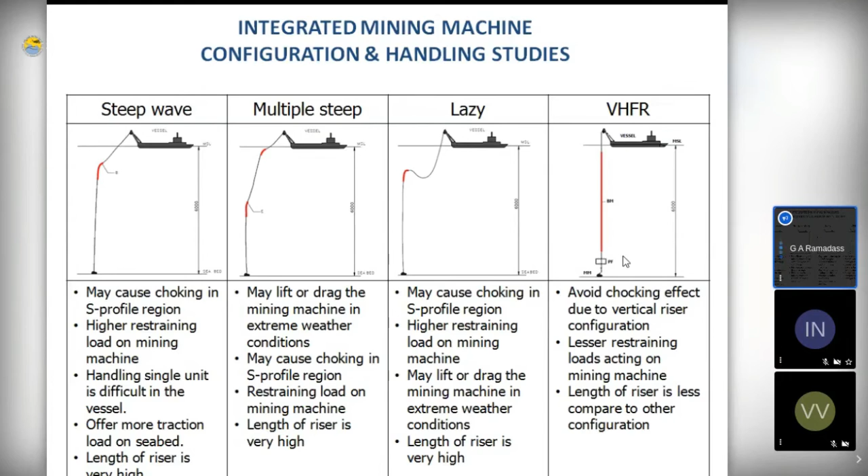From the mothership, we lower it to around 5,500 meters. There is an intermediate pumping station about 200 meters above the seafloor. This mining machine moves, collects the nodules, crushes the nodules, mixes them with seawater, and uses a centrifugal pump to send them to the pumping station, which is 200 meters above the seabed. From there, over 6,000 meters up to the mothership, it is pumped using a positive displacement pump.

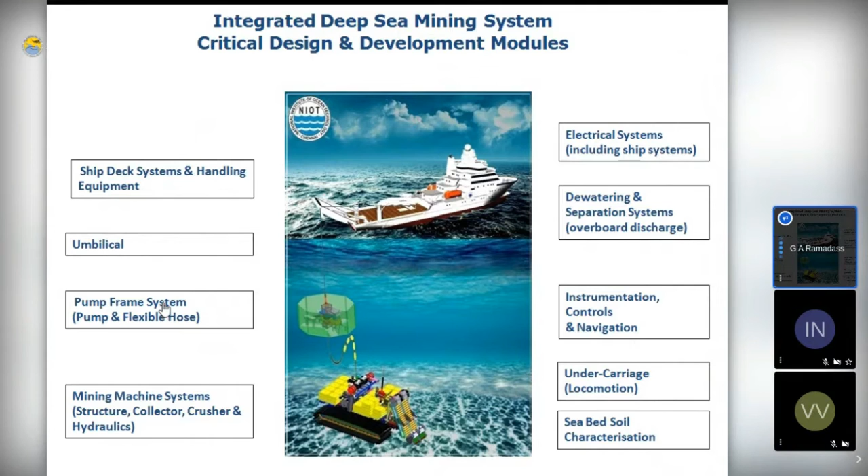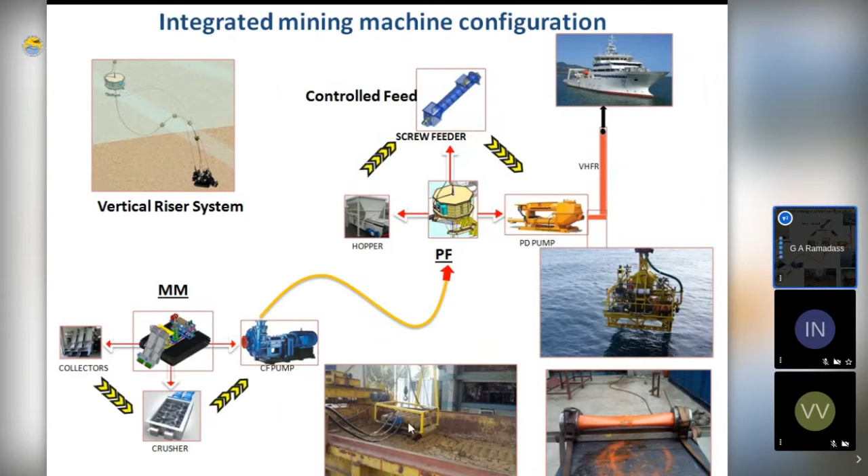So we have divided the critical systems into ship-based systems, water column systems, and sea bottom systems like this. I cannot talk about all the systems because of the paucity of time. We can see that the vertical riser, a hose, is tested. It needs the capacity to withstand around 120 bar internal pressure, so we tested that. The pump system is separately tested. The traction and locomotion are separately tested in the bentonite tank, which has properties similar to the seabed.

With all these things, we have assembled our crawler, and now this has to be lowered from the top and controlled from the top. You have to give power, give the control signals, get the data, and drive it on the sea bottom. For that, we made electronics, and we made a containerized control room where we sit and control this mining machine.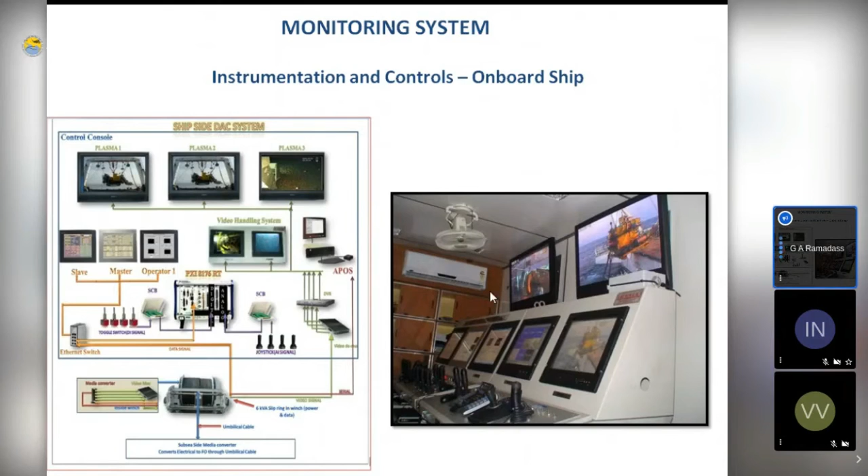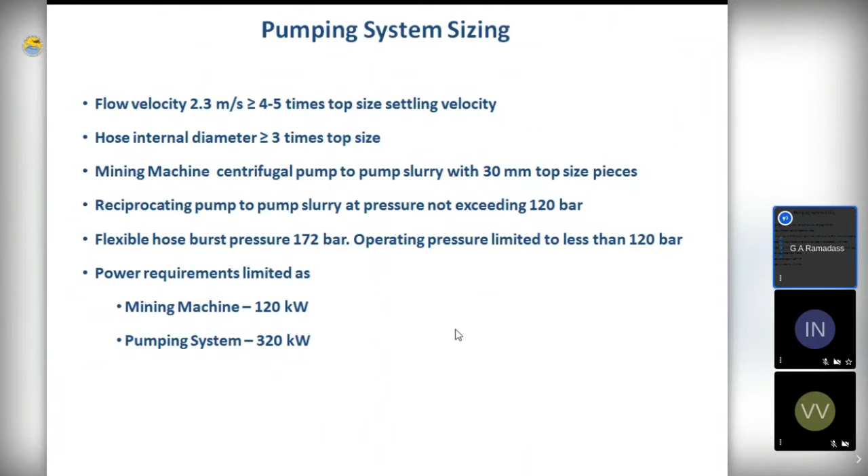And what sort of power is required for operating this pump and this mining machine? Our estimate clearly shows that we need around 440 kilowatts of power, which has to be supplied through an umbilical cable, which has optical fibers, conductors, and Kevlar for giving strength to the rope. We are in the process of identifying this umbilical cable and a specialized launching and recovery system for this. So this is how it looks when it is done.

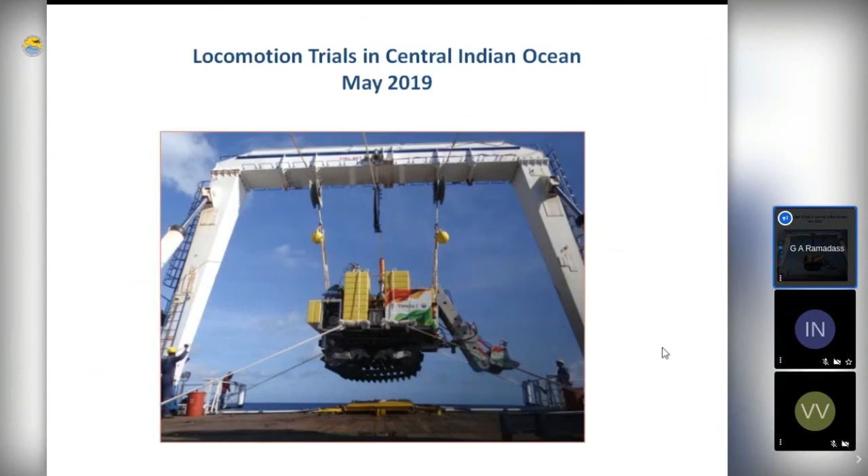When the crawler was assembled, we tried this locomotion in May 2019. So we are going in steps. First, at 65 meters and 890 meters, this machine was tested, and you can see how it was launched and the underwater pictures. You can see the track marks and how the soil was disturbed by this mining machine. It was successful at 890 meters.

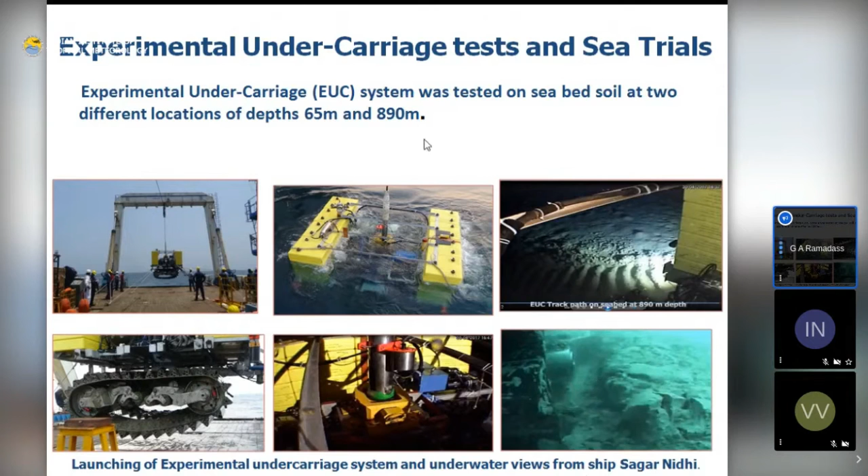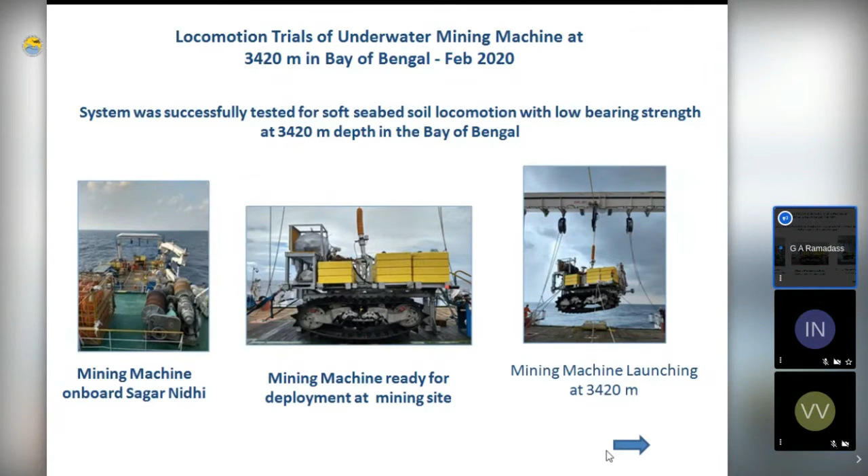The next phase was done very recently, in February 2020. At 3,420 meters, this mining machine was tested. It weighs around 15 tons in air and maybe 5 to 8 tons in water. This is how it is launched from the ship, and just before launching, you can see how it looks. There is a short video of our work. Maybe at the end of the talk, I'll be able to play a 2-minute video for you.

I have not talked much about the environmental impact or the metallurgical processes because I am sticking to technology development alone. But before we demonstrate our test mining system at the CIOB, the Central Indian Ocean Basin, we need to collect environmental data before, during, and after the mining machine trials. So we are working closely with the National Institute of Oceanography for collecting and analyzing this data. And these are our future plans.

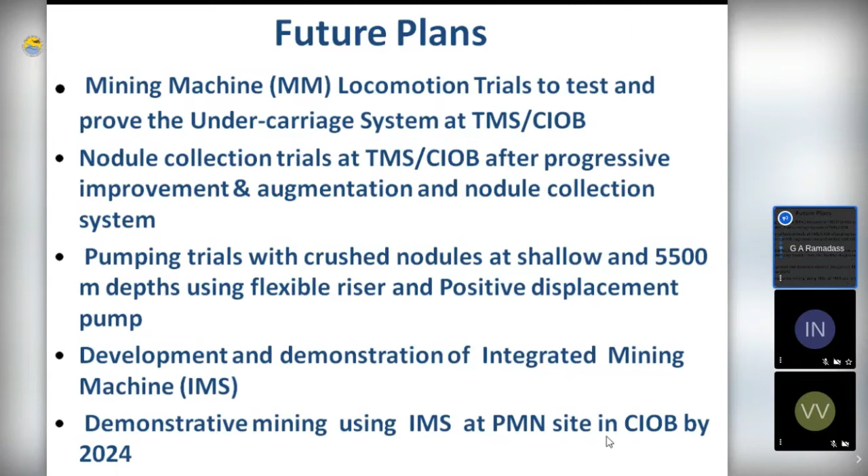We have divided our work into small steps. The first is to demonstrate locomotion at 5,500 meters water depth. Second is nodule collection capability and efficiency estimation. Third is to separately pump nodules which are already extracted, maybe taken in a basket to the depth, and demonstrate the pumping capacity. And finally, integrate all these systems and demonstrate an end-to-end system at 5,500 meters water depth. We are hopeful that we'll be doing it in 2024.

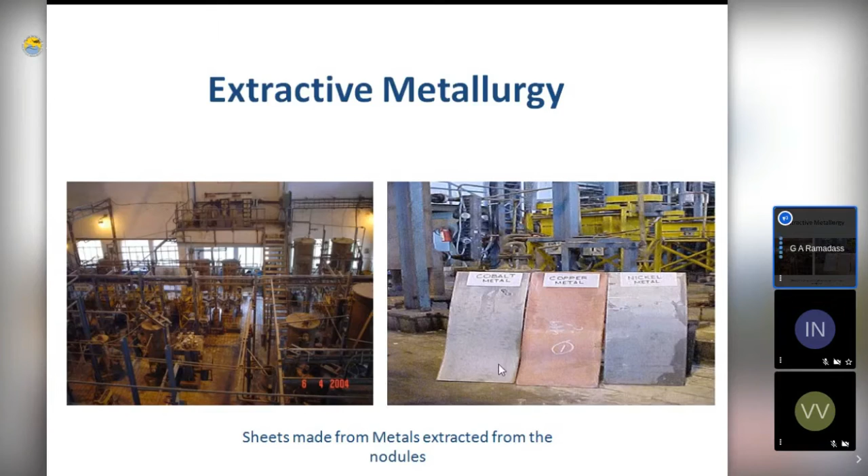I didn't talk much about metallurgy. You can see the sheets made of cobalt, copper, and nickel extracted from these nodules. They have not been brought by the mining machine, but were dredged using some kind of dredging technique. IMMT is actively working on this. So these are the vehicles that are the offshoots, or spin-offs, of this work.

We made a mining system which can go to 6,000 meters. We need a deep water ROV. We made a deep water ROV which can go to 6,000 meters. There is a soil tester which can go to 6,000 meters and test the soil strength in situ. And there's a drill which can be used for gas hydrate exploration. I am not going into that one now.

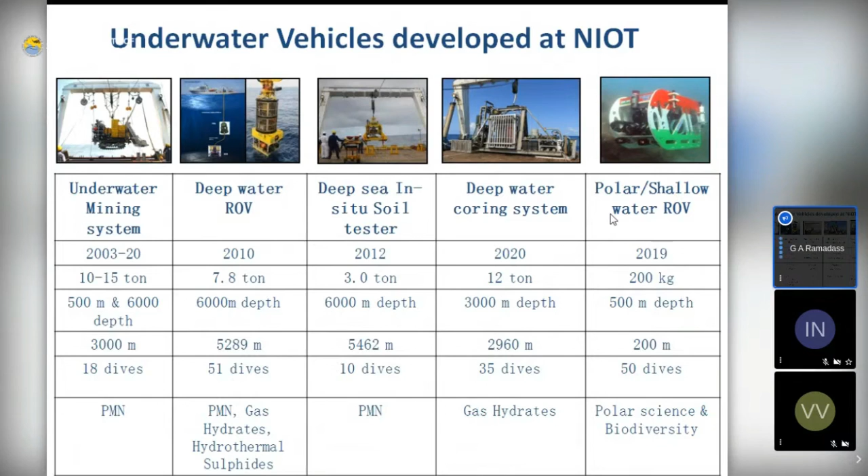And there is this shallow polar ROV which can work in 500 meters water depth, which can work in polar conditions also. In fact, it has been demonstrated at Antarctica also. So these are the spin-offs of the Indian deep sea mining technology development program. And the next step is, there are some limitations about unmanned vehicles actually. ROV has limited range and AUV has no control.

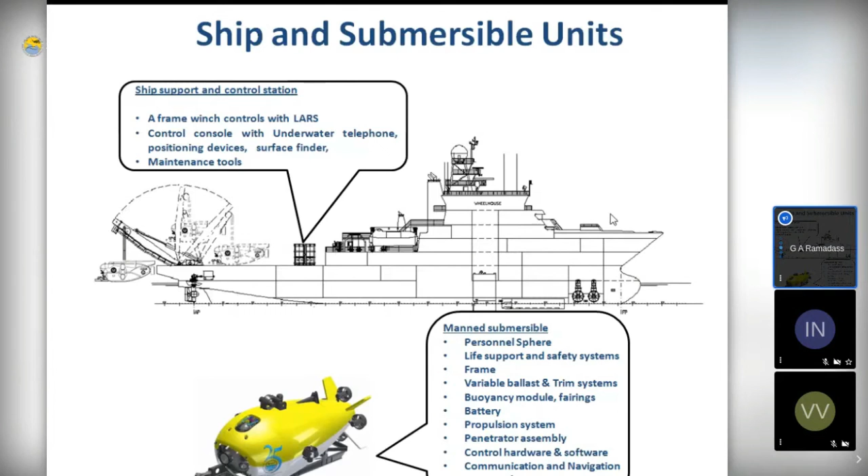If you combine the capabilities of these two, that is a manned submersible: 3 scientists can go to 6,000 meters water depth in a small submersible which has an endurance of around 12 to 16 hours and an emergency endurance of 96 hours further. So we started this project. It's called the Manned Ocean Mission. So we have identified what are the critical technologies involved in this one.

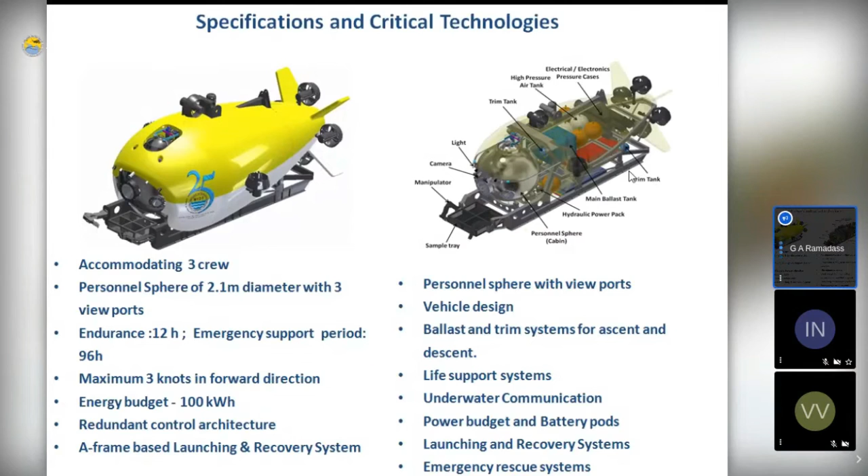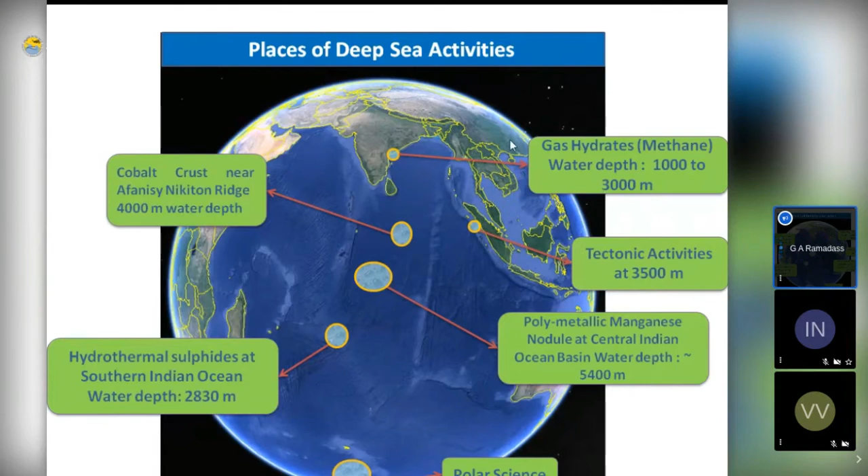So I would like to summarize my talk, because I think we are approaching the time. It is no doubt ocean is the treasure trove of strategic minerals. And as the depletion of terrestrial mineral resources is a fact, we cannot ignore the ocean mining option. Technology is maturing, and several nations and conglomerates are developing these technologies, including India. There is a misconception that India is not in the forefront. But through this webinar, let me assure you that India is very much in the forefront. In fact, ISA is looking forward for India to demonstrate this technology at 5,500 meters water depth.

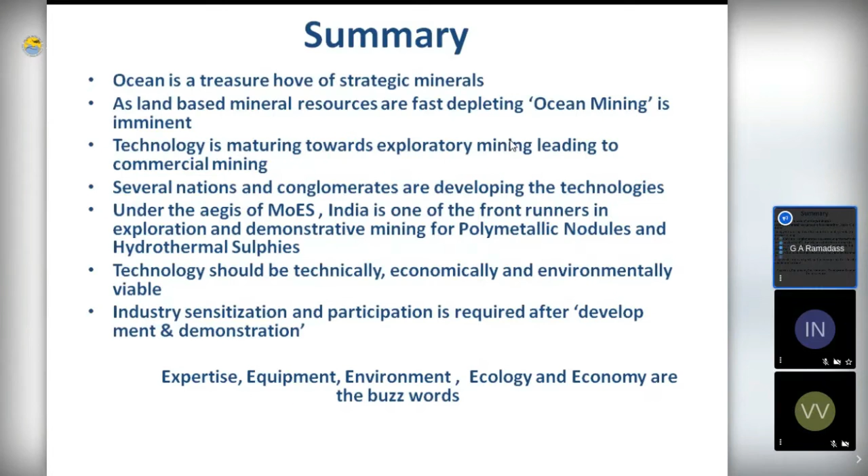But whatever technology we develop, it should be economically and environmentally viable. At this juncture, our motto is to develop and demonstrate. I think that we have done, and we have been doing it. Now it is high time that industry is sensitized about the need of this technology, and we have to make them participate in this venture. There are many E's involved: expertise, equipment, environment, ecology, and economy. These are the buzzwords we cannot forget.

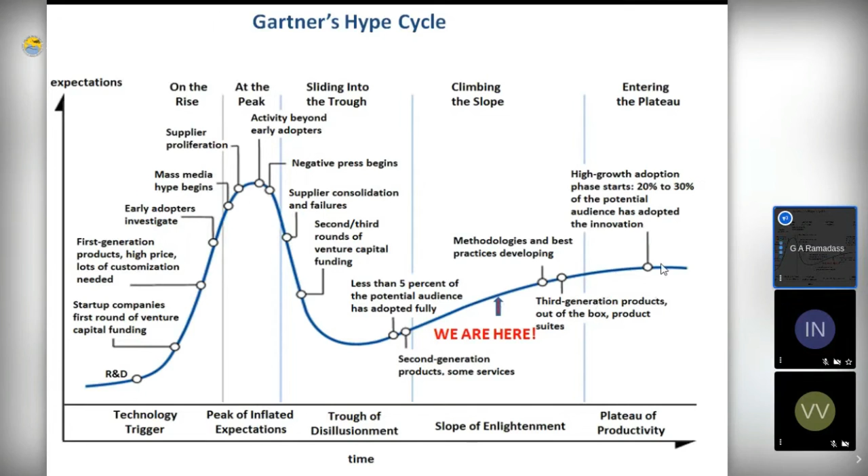I would like to conclude my talk saying that there is something called Gartner's hype cycle. When an idea is generated, it gets a lot of hype, and media also joins in. So it's at the peak. But after some time, the negative press starts. So there is a peak of inflated expectations, a trough of disillusionment, and later the technology matures and slowly it goes up. In my view, we are at the slope of enlightenment, and success is just round the corner, and very soon there will be a mature technology for safe harvesting of minerals from the ocean depths.

I could not cover a lot of topics because of the paucity of time and my own limitations, but there is a wonderful book compiled by Dr. Rahul Sharma, ex-NIO Goa scientist, with the who's who of the Indian mining program, renowned stalwarts of the program: Dr. Sudhakar, Dr. Baban, Dr. Nagendranath, Dr. Das, Dr. T.R.P. Singh, Dr. Atmanand, and yours sincerely, and so many people. I might miss some names.

They all have contributed to this book, and it makes wonderful reading. In its time, it was one of the most downloaded books, if I am right. You can get it from the internet, and it makes a good reference book for people who want to work in mining technology development. And it is clearly said that the impossible is indeed possible when talented engineers with the courage to take prudent risks are provided an incentive to stretch the state of the art. This is the statement of the Hughes Glomar Explorer expedition.